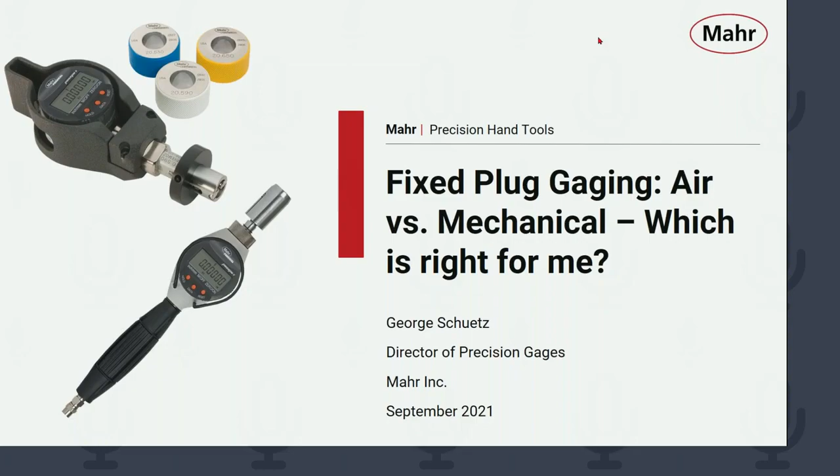Today's topic is fixed plug gauging, air gauges versus mechanical. Which is right for me?

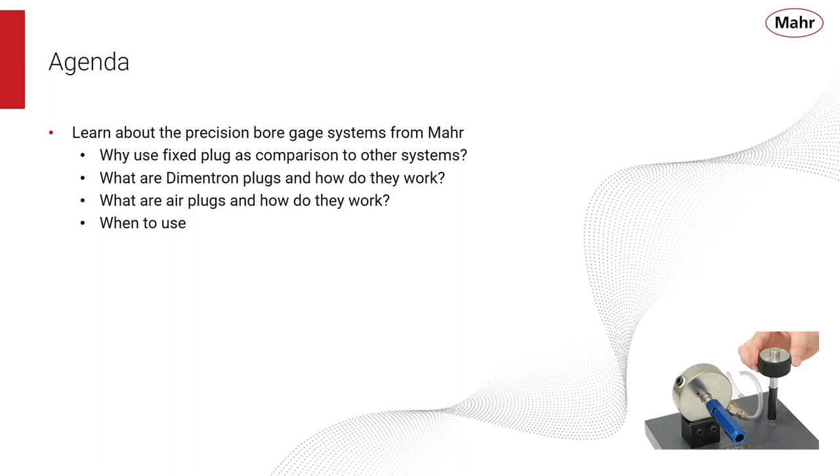Today we're going to learn about precision bore gauge systems from Mahr. We're going to see why we're going to use a fixed plug as a comparison to other types of plug measuring systems. What are Dimentron plugs and how do they work? What are air plugs and how do they work? And then we're going to decide which might be the best for our application.

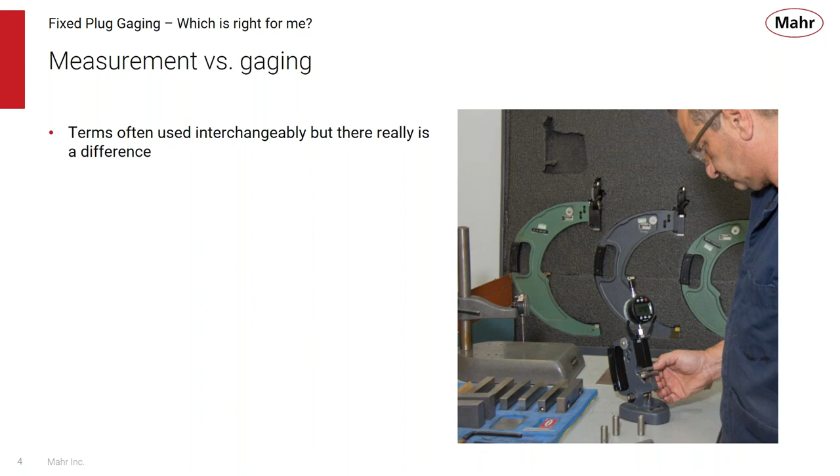The first thing I want to talk about is the subtle differences between measurement and gauging. These terms are often used interchangeably, but there really is a difference, and it can be a significant difference. I think measurement is the process of determining a dimension of a part by comparison to a standard, while gauging is a process of determining whether the dimension is smaller or larger than the standard. They sound kind of similar, but let's dive into this and see what the difference really is.

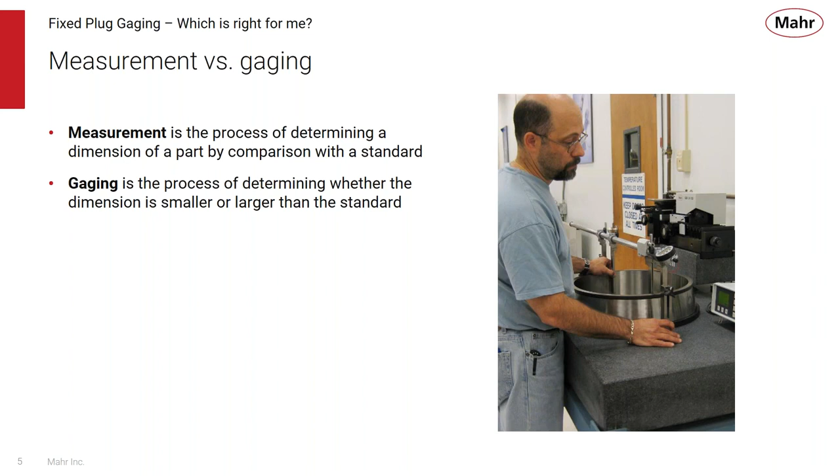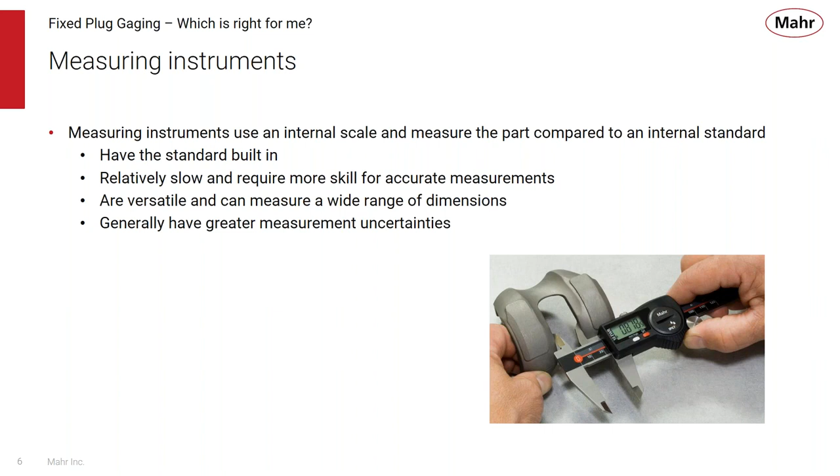Measuring instruments use an internal scale, and the measurement of the part is compared to that internal scale. So all measuring instruments have the standard built into them. They tend to be relatively slow and require more skill for accurate measurements. They're very versatile and can measure a wide range of dimensions, but because of operator influence and the way the gauges are designed, they generally have a greater measurement uncertainty.

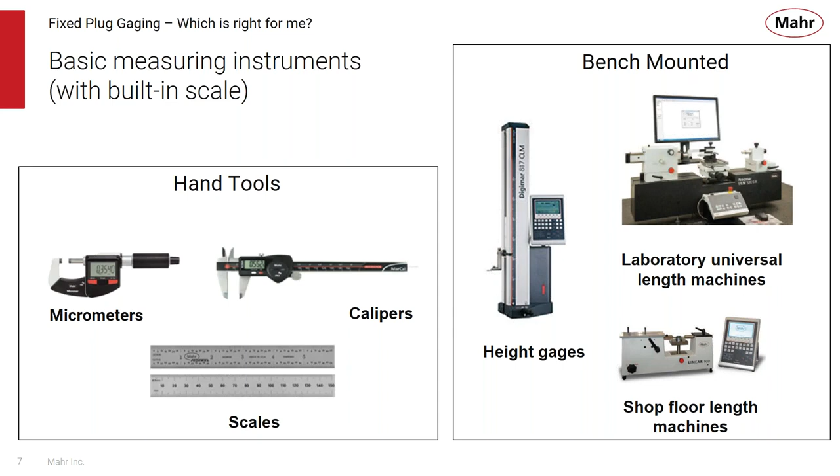These are examples of basic measuring instruments. They all have the scale built into them. You're familiar with micrometers and calipers, even the scales themselves, which have the lines etched into them. That is basically the reference standard that we're comparing the part to. You can have bench-mounted measuring instruments, such as height gauges, laboratory universal length machines, or even shop floor length machines. They have lots of versatility, they can measure lots of different things, and because of that, they tend to be a little bit slower for the operator to use. But under the right environment, especially with universal length machines, you can get some very good results.

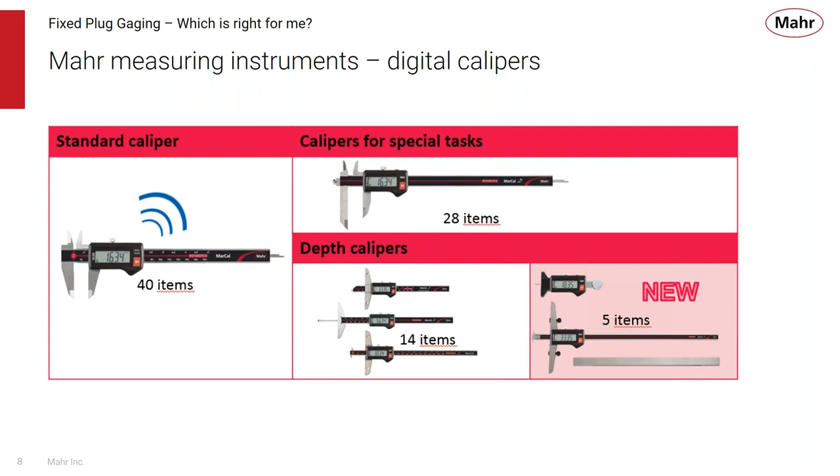Digital calipers are an example of a measuring instrument. Mahr makes a whole family of these, whether wireless or specialty calipers, depth gauges, and so forth. These are measuring instruments, as are micrometers, with their capability of different sizes, different ranges, different features, and so forth. So there's a whole family of different digital micrometers.

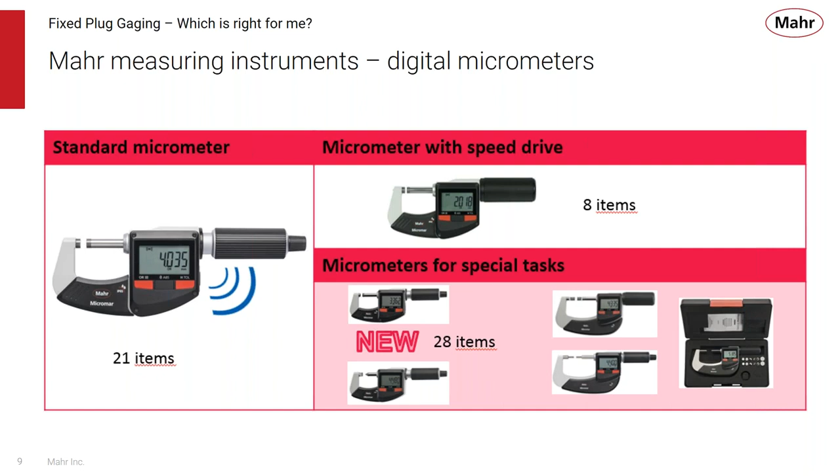Now, gauging instruments are a little different. They determine whether the dimension of the part is smaller or larger than a predetermined standard. So gauging instruments have external standards. They tend to be faster and more accurate than measuring hand tools. Because of their design, they're generally more dedicated to the task, and gauging instruments can be defined into different levels of performance.

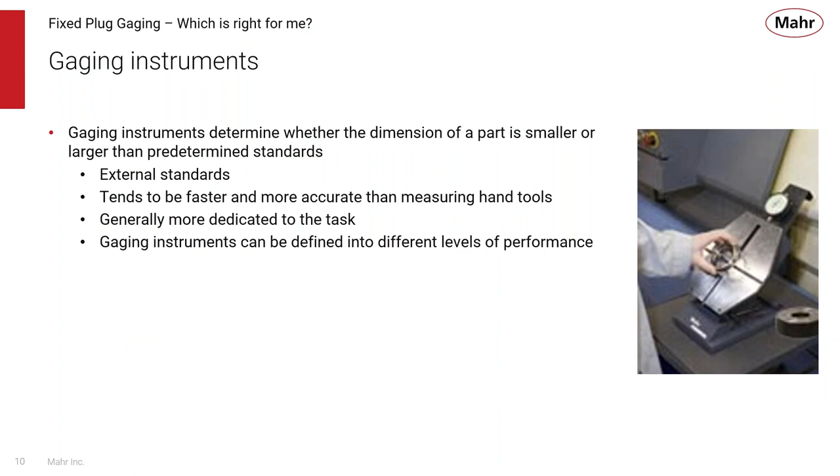The first level of performance for gauging is adjustable variable gauges. They indicate how much the part deviates from the standard it was set to. They can be adjusted to measure a specific size, but they have a limited measuring range with a lot of adjustable range. They provide the actual deviation, so you can get data out from that indicator if you like.

With these types of gauges, the operator has to sweep the part to capture, in the case of a bore gauge, the minimum size or the reversal point to get that diameter. So therefore, the gauges take some operator skill, but a skilled operator can be very fast, use the gauge with lots of ease, and get some very good results. All these gauges have an external standard, typically the nominal master, and these can have a fairly large investment, but they can last for decades when well maintained. By exploring the part, you can learn about the form, use that information for process trends, and maybe diagnose manufacturing issues.

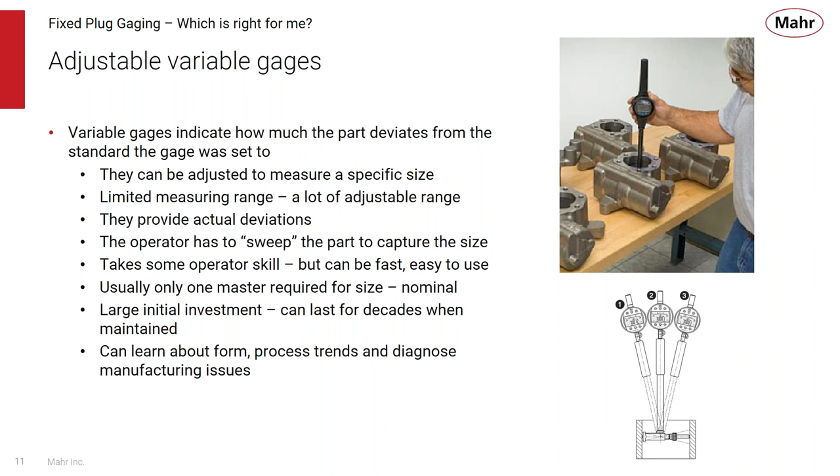So these are some of the adjustable variable gauges that are offered by Mahr: our adjustable bore gauges and our ID/OD portable gauging systems.

Now you can take an adjustable variable gauge and add a reference to it, and that really increases the capabilities or performance of the system. Variable gauges with a reference indicate how much the part deviates from the standard the gauge was set to. They can be adjusted to measure a specific size. They incorporate a reference stop, which helps position or lock the part into a repeatable place for measurement. That really reduces the operator influence, and you always can get the part back to the same location.

So these require very little operator skill. They can be extremely fast and easy to use. These variable gauges have limited measuring range, but a lot of adjustable range. Because they're variable gauges, they provide actual deviations. One master is required for setting. It's a big investment, but these gauges last for decades if well maintained. And of course, you can explore the part for form, process trends, and diagnose manufacturing issues.

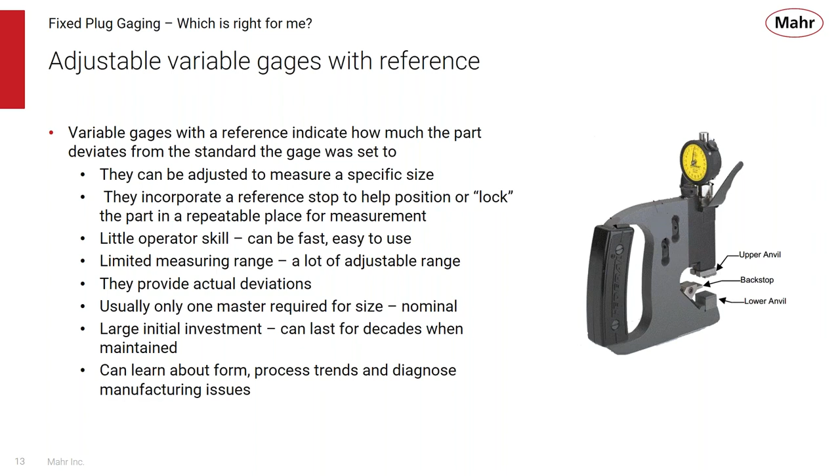So these are some of the adjustable variable gauges with reference that Mahr provides. Snap gauges for portable measurement. You can bench mount them. Plus, we make some ID/OD gauges in 2 or 3 point contact systems to measure IDs and ODs. Plus, if you have a stand and you put a backstop on it, that also increases the capabilities and repeatability of that gauging system.

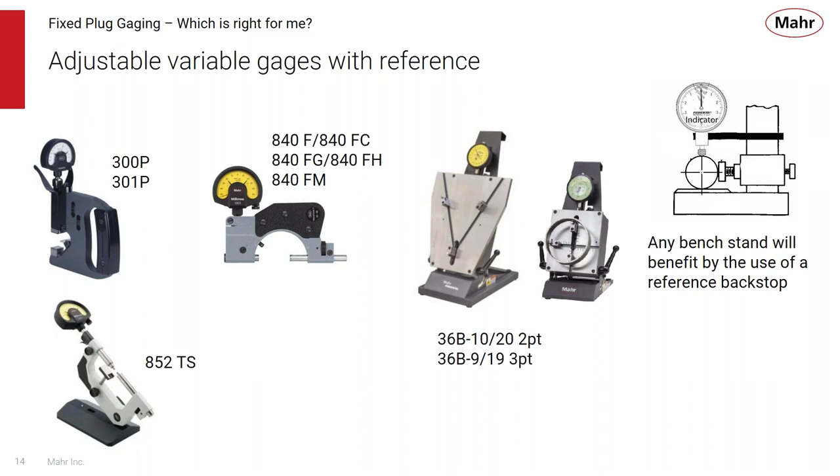And then there's fixed variable gauges. These are variable gauges made to a specific size. They tend to be the most accurate. They again provide actual deviation, so now you can collect that variable data. These have the least operator influence. The operator simply puts the plug gauge, for example, into the bore. There's no rocking, there's no centering. The gauge finds its own center. So it's the fastest to use with the highest performance.

Of course, these gauges measure only one size, so they're dedicated to that function, but you can really learn more about form, process trends, and information to improve that process, because you can get some very good results with very high resolutions. For measuring a single bore, this is the largest investment, but again, these can last for a very long time and in fact last millions of parts when used properly. Again, one master is required, a setting master for the nominal size.

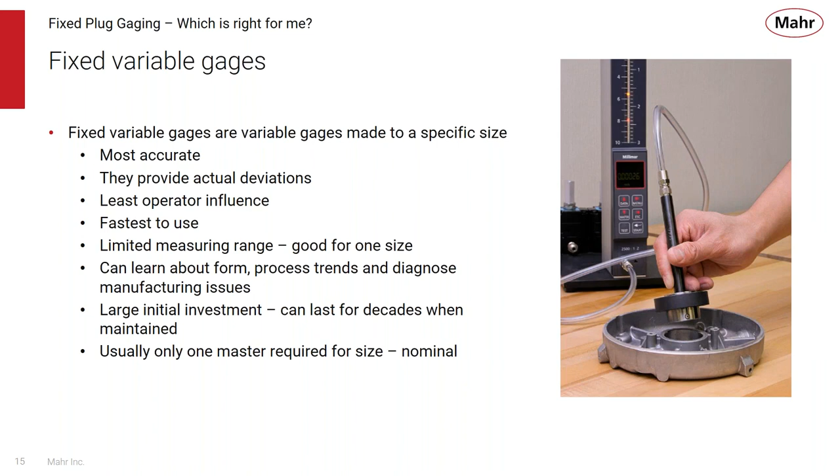So Mahr offers a number of fixed variable gauges. These are plug gauges, our Dimension plug line, our 844D ID plugs, and air gauging. All these plugs are made specifically to measure a certain size and tolerance.

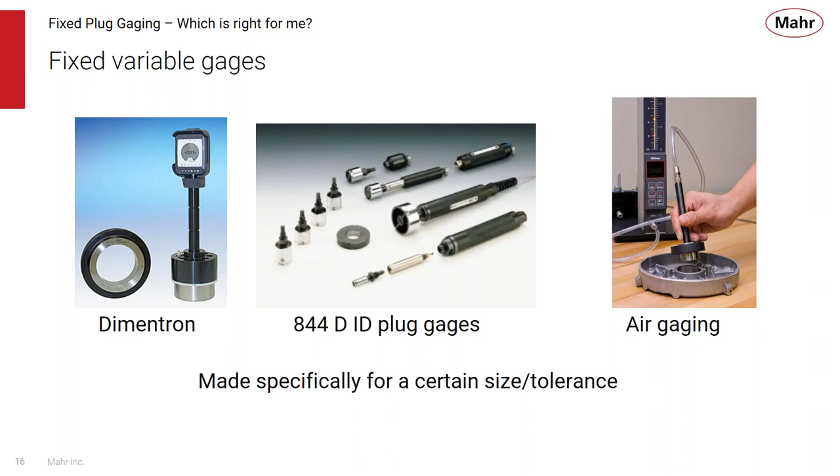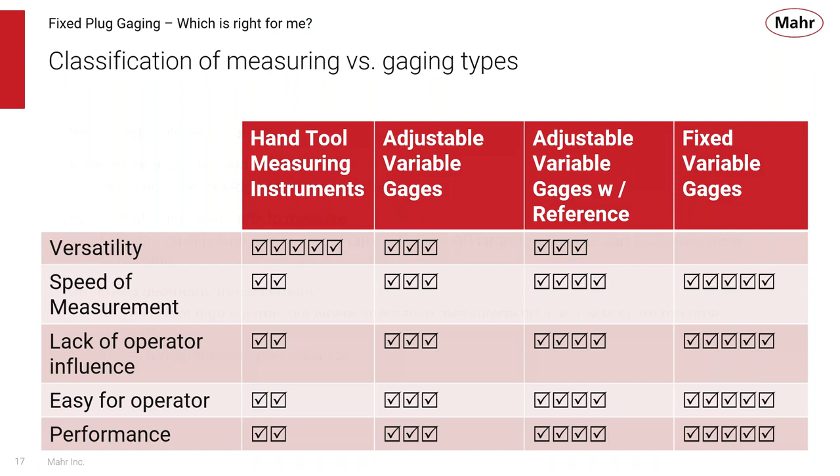So once you start talking about fixed plug gauging, you have to realize there's some qualifications for that. You have to have a pretty good tolerance condition. Tight tolerances are meant for fixed plug gauging. You want to know when that part is good or bad, and you want to know that variation so you can do something with that information. Usually these types of gauges are used when there's a high volume of parts because it allows the operator to measure that part as fast as possible with as little influence as possible.

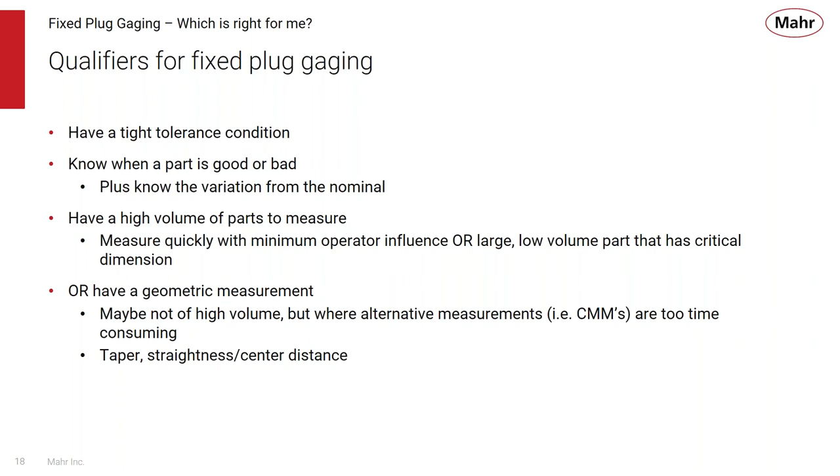But sometimes fixed plug gauges are used in applications where the volume might be low, but there might be no other way to get the performance that's required. And sometimes these plug gauges can be used to help find geometric conditions, and we'll talk about some of those because there might be no other way of doing that type of measurement out at the point of manufacture.

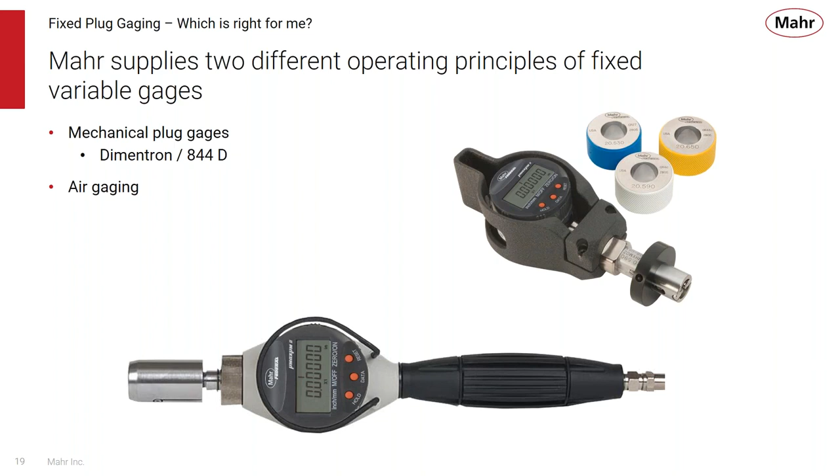So we said that we supplied two types of fixed plug gauging, our mechanical plugs and air gauging. And if you compare them, there's different qualifications for each one of them. Now let's take a look at the differences and the different applications for a mechanical fixed plug gauge or an air fixed plug gauge.

With mechanical plug gauges, we say that we want a tight tolerance. Tight tolerances are plus or minus 10 thousandths of an inch or so, high volume of parts, little operator skill—all the features of a fixed plug gauge. These can get some pretty good accuracies, 10 microinches.

We're going to know the variation. Because there's mechanical transfer in the way these gauges work, they have to be used in a fairly clean environment. Most of these plugs have a flow-through type of operation, so you can clean them out, but the mechanics and dirt just don't mix sometimes, and we have to make a consideration for that.

They can be used in a shop environment. They're very low cost to operate. The nice thing about mechanical fixed plug gauging is that they're very portable. There's no air supply or cables or anything like that to get a good measurement. So a person can carry this around, put it into the machine tool, make the measurement, and use this truly at the point of manufacture.

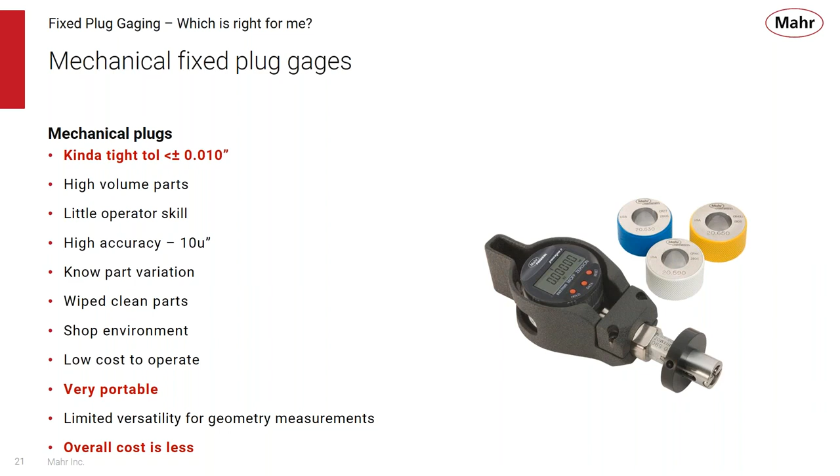You can get some limited versatility for geometric measurement. By that I mean you can explore the part for an ovality condition or potentially a straightness or taper type of condition, so you can get some information about the form of the part. Overall, these cost probably a little bit less than air gauging.

We make our Dimentron plug lines here in Providence. They're very, very rugged. They have a standardized zero reference, which means that you can take any plug, exchange it with the handle or the display, and the zero is set to within a certain tolerance. They're fully interchangeable, and you don't have to make any adjustments when interchanging plugs. These types of plugs are repairable, and there's lots of opportunities for making specials of these Dimentron plugs.

We also offer our 844D plug system. This is a plug made in Germany. It can be repaired. There are options for doing a zero reference. They are very rugged, there are some specials, and these offer some different types of application support.

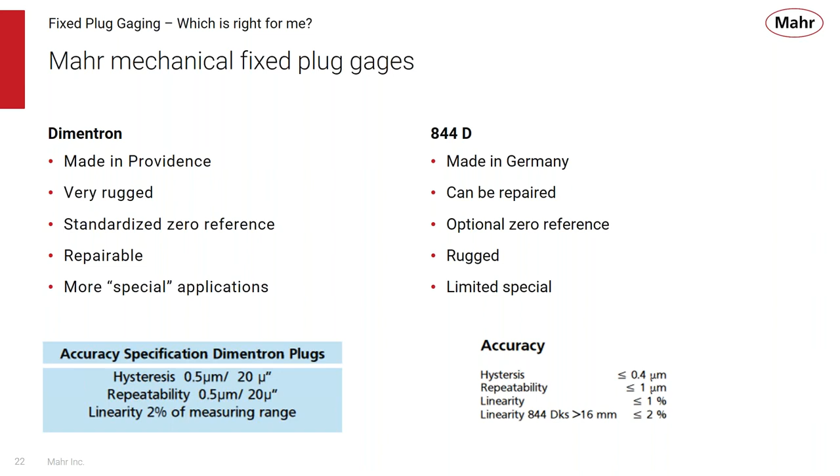So both lines are fixed plug gauging, and there are just some slight differences between them, which can be considered when trying to measure a precision bore. They have very similar measuring and specifications, size ranges, etc.

So when you're considering a fixed plug gauge, a mechanical one, you should know how they work, what the sizes are offered, the actual measuring range of the specific plugs, how to match the part tolerance to the plug range, what are the standard configurations, the different displays that can work with them, and any other information that might help you select the right plug.

Mahr has a very good technical support team in Providence. So if you have applications for mechanical fixed plug gauges, you can contact us with the diameter, the tolerances, and the application needs, and we can make the best recommendation for that application.

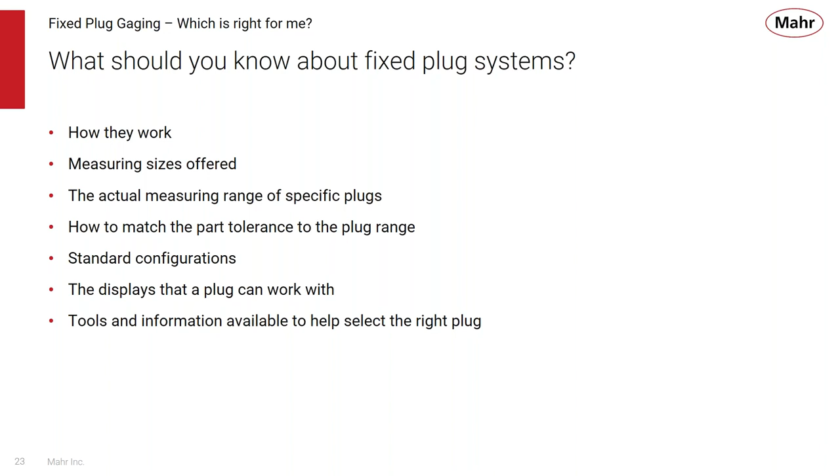Is selecting that fixed plug mechanical gauge black magic? Well, not really. Applying a Dimentron or the 844 is no different than selecting an adjustable bore gauge, an air gauge, or a snap gauge. You have to know what the size is, what the tolerance is, and where that measurement is. But because it's made to a specific size and application, if you make a mistake in specifying it, it's going to make a plug to the wrong size and you might not be able to use it. So it's very critical to ensure that the size and tolerances are specified correctly for a fixed mechanical plug gauge.

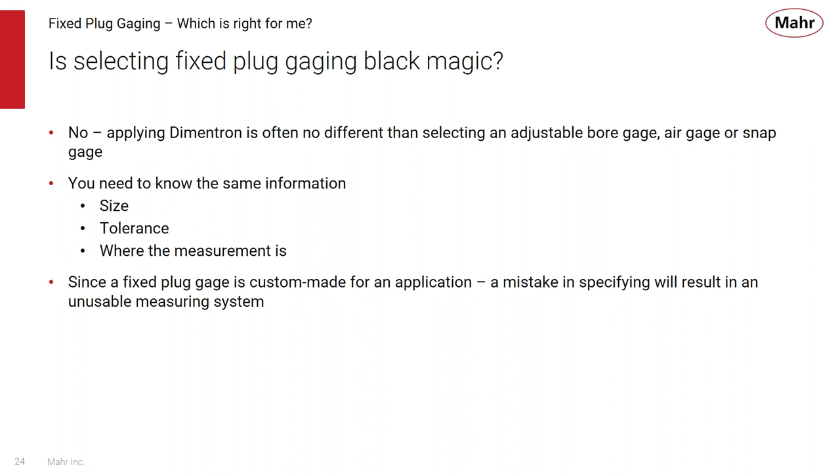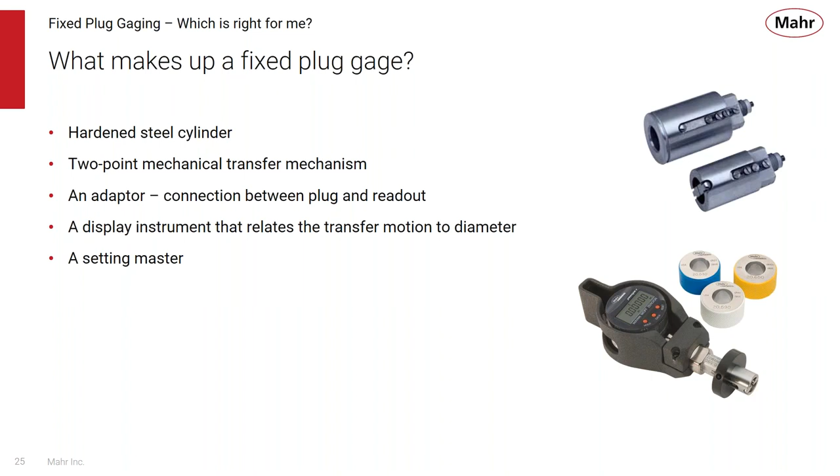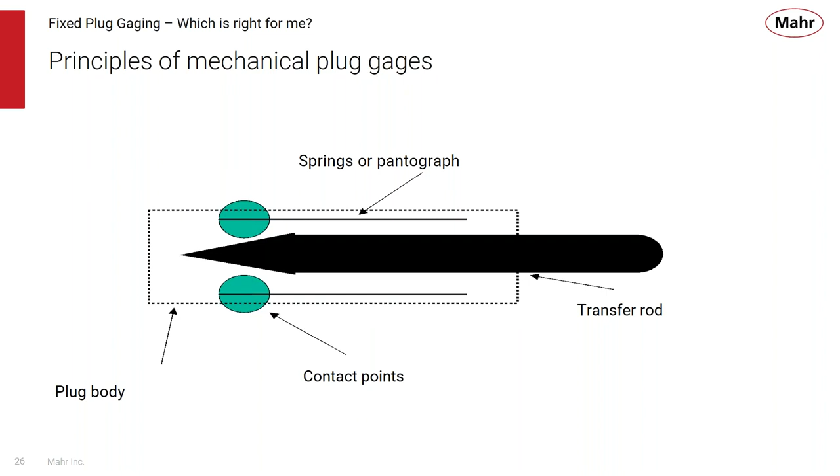So basically what's inside a mechanical plug is a number of contact points—2 contact points on either a spring or a flexure that, when compressed by the bore diameter, pushes the V-rod back out of the plug, and then we have a display unit measuring that variation. So you can see as I go back and forth here, the V-rod is pushed back and the measuring instrument records and looks at that value. It's a very simple concept, but it provides a 1-to-1 ratio of the V-rod to the movement, so there's no compensation needed for the display using the plug gauge systems.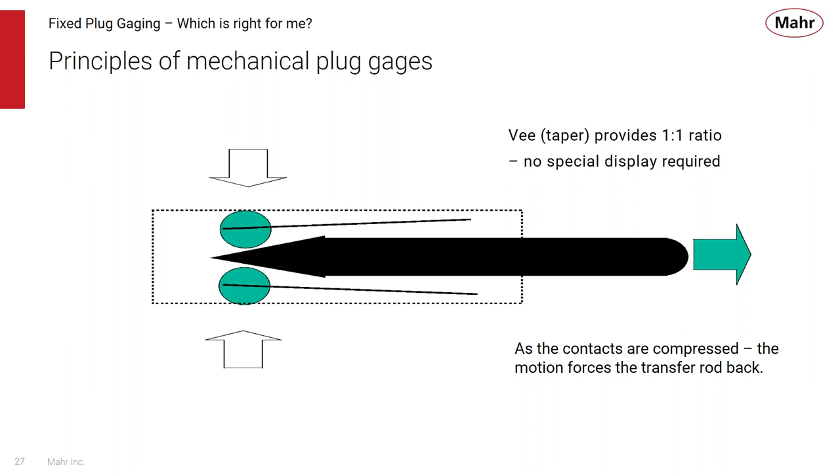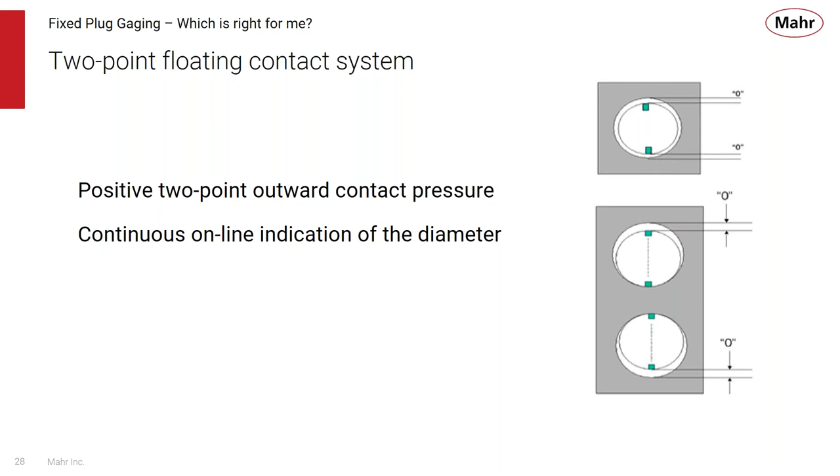Because it's a 2-point measuring system, kind of a differential measuring system, the body or the plug can be moved slightly, even with its small clearance. You will not get any variation in the diameter, because as one contact moves in, the other one moves out, and you still get the true diameter of the part, whether you're measuring it axially or radially. So you have a continuous online indication of the part diameter.

Because of that, you can take that plug gauge and put it into the bore, measure the diameter, but now you can rotate it or move it up and down axially in the bore to explore the bore for barrel shapes, taper, or hourglass shapes. We also make blind hole plugs or through hole plugs, so that depending on the bore application, we can get as close to the bottom of the bore as we can.

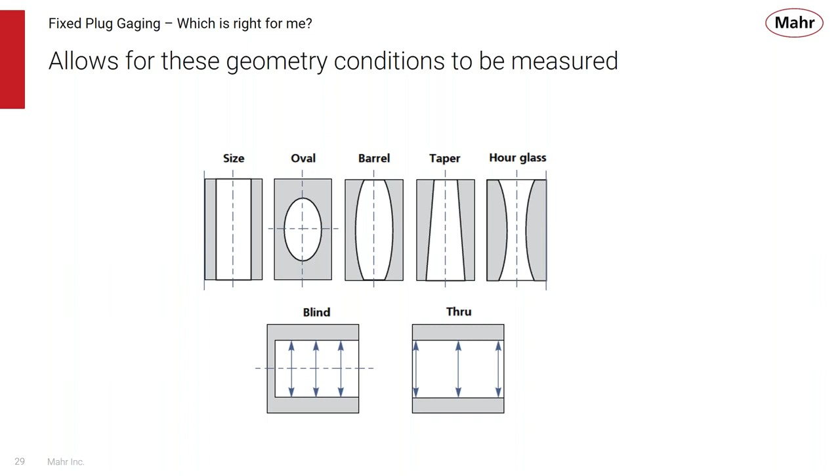Blind hole plugs have a dimension of 157 thousandths of an inch to the bottom of the plug. We can make plugs that are closer, down to 80 thousandths. And we also have a super blinds family that can get down to 31 thousandths to the bottom of the blind hole. Plug starts at 120 thousandths, and we can make plugs up to 9 inches, and even special larger sizes are available. So we can cover a full range of different tight tolerance bore characteristics with mechanical plug gauging.

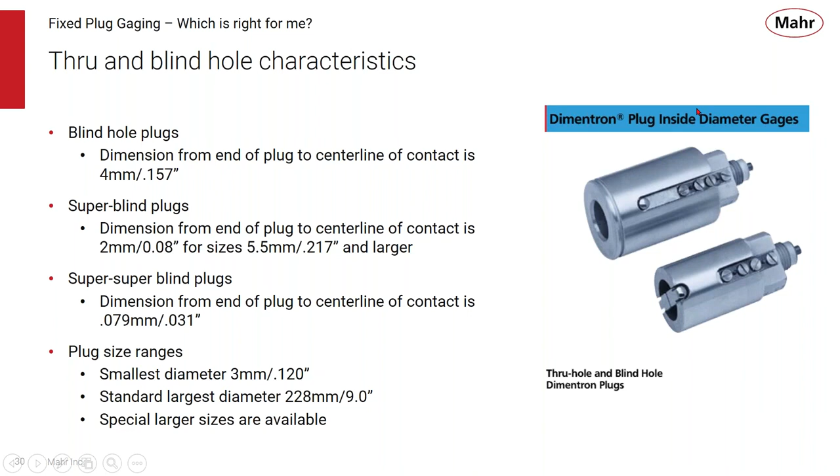The features of our plugs are that they're engineered for high production use. They have a hardened body, and can be flash chromed or coated with a diamond-like coating. We use carbide contact points, but we do offer options for steel or sapphire when the material of the bore requires those types of contacts. You get very good repeatability and excellent GR&R capabilities. Calibration accuracy is better than 2% of the full range.

I talked about flow-through cleaning so that dirt will not stay in there if the plugs are cleaned on a regular basis. And they are self-centering, a differential measurement, the way they work, so that they can give you a true diameter regardless of the orientation in the part.

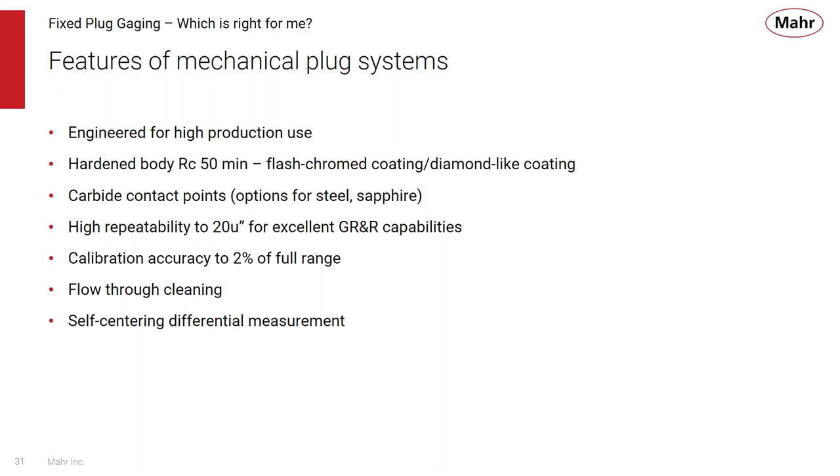So that's kind of the overview of mechanical plug gauges. Let's take a look at air gauging applications for bores.

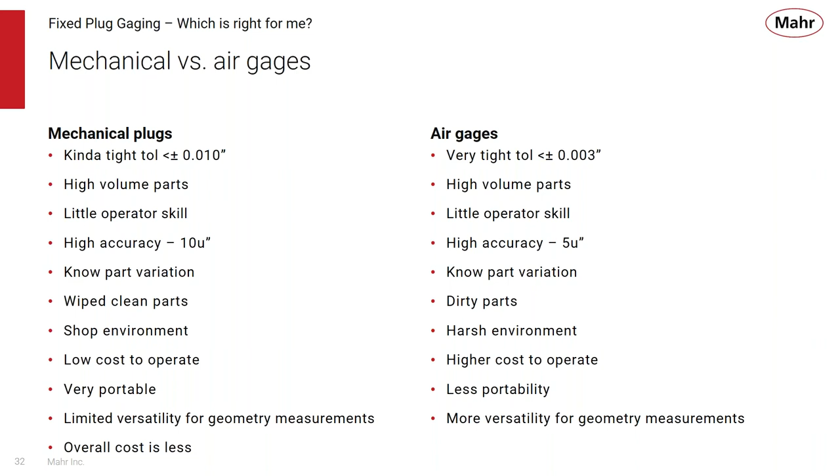Air plugs can measure a tighter tolerance, tolerances that are plus or minus 3 thousandths or smaller. Again, because they're a fixed plug system, they're good for high volume parts, and offer the operator a very easy to use system. You can get accuracies of 5 microinches or better, especially for repeatability, because these are used over such a small range, and you can get very high resolution applications.

Again, we're going to know the part variation. The nice thing about air gauging is because air is flowing out of the system, it tends to clear away any water-based contamination in the bore. So these are really great items to use at the point of manufacture in those harsh environments. They tend to be a little bit higher cost to operate, but they can give you a much higher performance measurement.

Because air plugs have a hose to them, that kind of restricts portability a little bit, but the air hoses are very flexible and can go up to 10 feet with no problems and still use that air plug in the machine at the point of manufacture. The nice thing about air plugs, as we'll see in a minute, is that they have more versatility for geometry measurements.

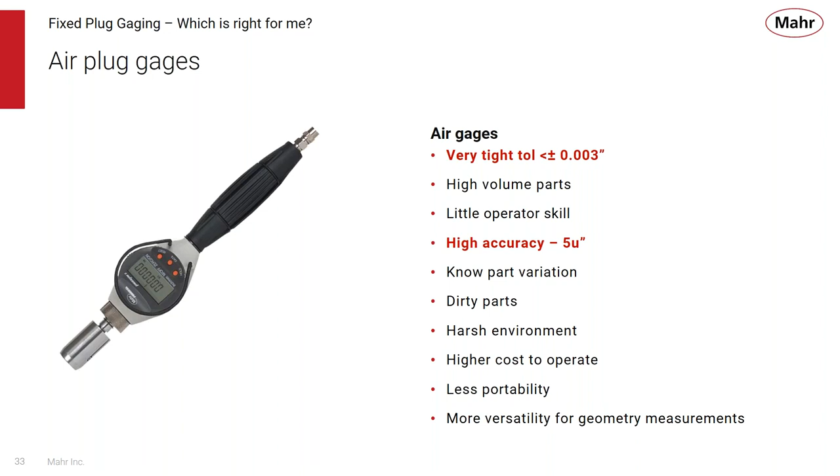So why use air gauging? Again, it's a fast, self-aligning measuring system, very high resolution, very easy to use. It's non-contact. It doesn't have contact points like a mechanical plug gauge. Of course, because it still has a body that touches the bore, the plug is contacting the bore itself, but the measuring part is non-contact because it's using air back pressure to make its measurement. And it's kind of a self-cleaning type of plug where the air clears away any water-based surface contamination.

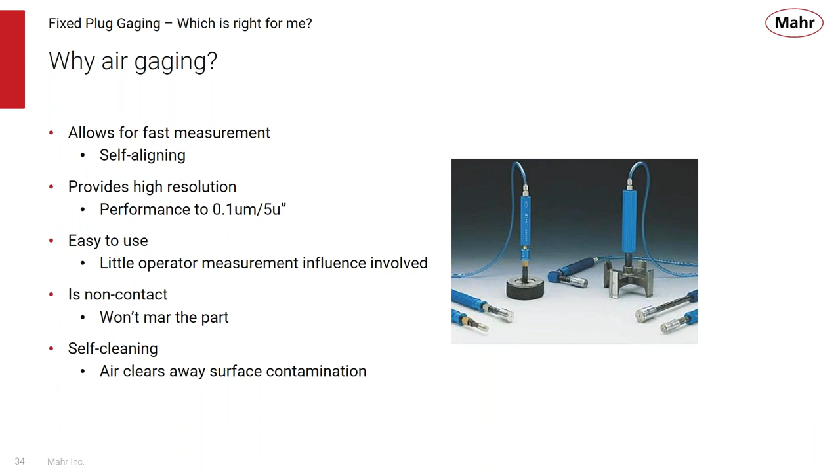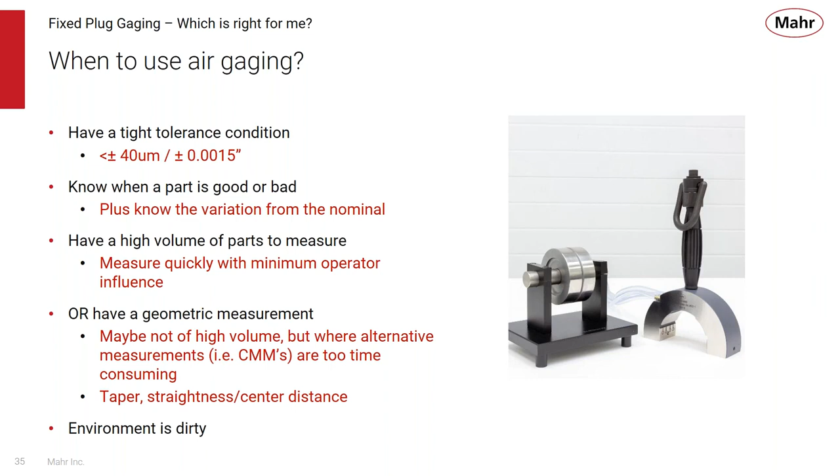So again, we use these in a tight tolerance condition. We want to know the variation, and we want to make the measurements quickly, especially for high volume applications with minimum operator influence. Because they offer such a high degree of performance, you might have a very large diameter in a low volume part, and there might not be any other way of making that measurement on the shop floor than air gauging. So air gauging, despite its cost, might be the best way for some low volume applications. And air gauging gives us more capabilities of looking at the part for taper, straightness, center distance, etc. It's great for the environment when it's at the machine and it might be a little bit dirty.

So is air gauging difficult to apply? Well, not really. It's the same type of questions you have to ask about any application. You have to know the part size, the tolerance, where the measurement is to be made, and what's important with air gauging is we should know what the surface finish is. Since air gauging is custom made, just like the mechanical plug, any mistake in specifying the tooling could result in an unusable measuring system. Same questions to ask for any dimensional gauge application.

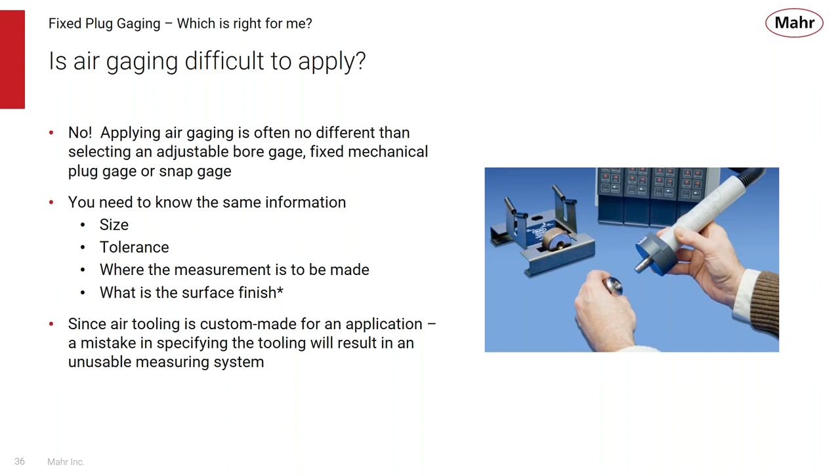Now, how does an air gauge work? Well, it works on the idea of back pressure. Just like you might hold a garden hose against the wall and close the distance, the water is going to spray off until it's finally shut off. Something's happening to that water pressure that's in the hose - it increases as the distance decreases. So water and air act very similar, and you can do the same thing with an air gauging system.

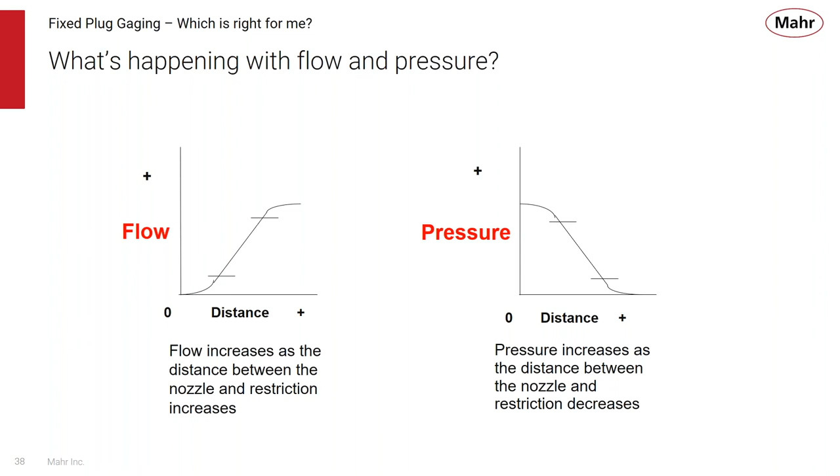If you plot out airflow or the pressure in the hose, you get two opposite pressure-distance curves, or a flow-distance curve. On the pressure side, as the distance between the jet or the nozzle decreases, the pressure increases. And as the spacing increases, the pressure decreases. So if you can control the pressure, the jetting, and the hole dimensions, you can create a very straight linear part of this curve. And that's what we use to determine diameter by air pressure.

This is the basis for all our air gauge systems. When we can control the air pressure, the manufacture and position of the air jet, the manufacture of the air plug, and calibrate and zero the location of pneumatic zero, we can get very repeatable and accurate results. These results can be used as the means for displaying a dimensional measurement. This is the basis for all of our air gauge systems - they're all made to a common standard, interchangeable, just like our mechanical plugs.

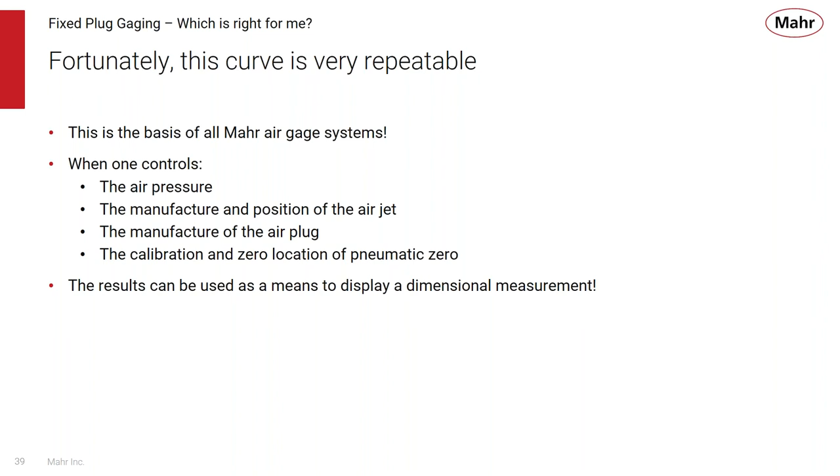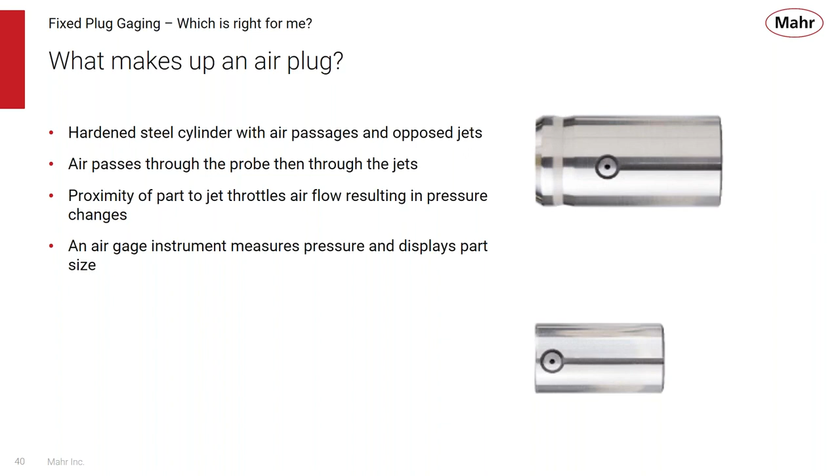So the air plug is nothing more than a hardened steel cylinder with passages for opposed jets. These are examples of two-jet air plug systems. The air passes through the probe and comes out of the jets. The proximity of the part throttles the airflow, resulting in pressure changes back towards the instrument, and the air gauge instrument measures that back pressure and displays the part size. Again, if we can control all the characteristics of the plug, we can provide a very accurate measuring system.

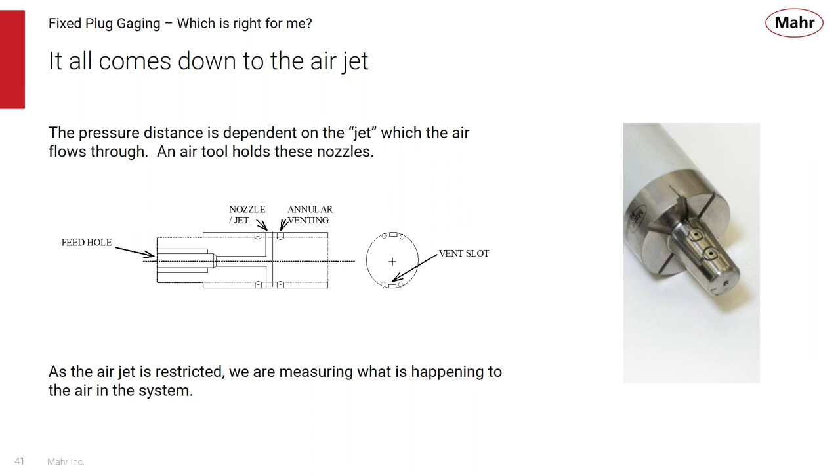I think it's probably the greatest feature about air plugs - the jets themselves, which are really sensors, can be positioned very close together. I don't think there are too many other sensors that can do the same thing at the cost of an air plug. Typically you can put jetting as close as 100 thousandths of an inch, but sometimes even closer. So this provides the capability of doing multiple dimensions or geometric checks in a single tool.

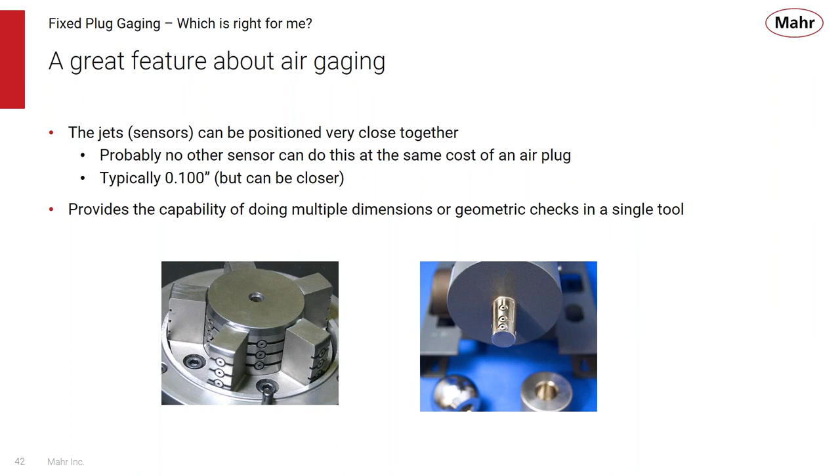So here's a couple examples of multi-circuit air plugs doing multiple diameters at different levels. And if you try to consider doing this either with, I don't know, mechanical transfers or probes or something like that, it'd be nearly impossible to do something like this out on the shop floor and get good results.

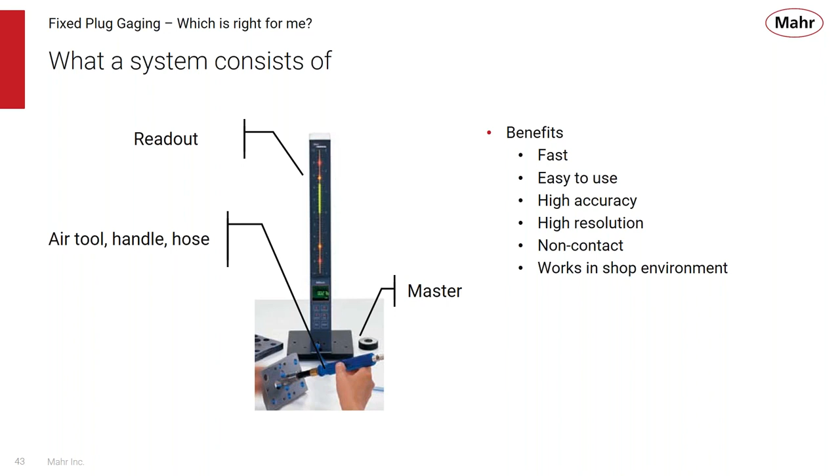With an air gauge system, you have kind of the same types of components: you have the air tool, a handle, and a hose, a readout, and a master. With these three parts, you can create an air gauge system that's fast, easy to use, highly accurate. You get good resolution, it's non-contact, and it's great for the shop environment.

Air plugs are very similar to mechanical bore gauges. They allow us to explore the part for size, ovality, barrel, taper, and hourglass. But because of their higher resolution, we can measure tighter diameters and control those form errors even better.

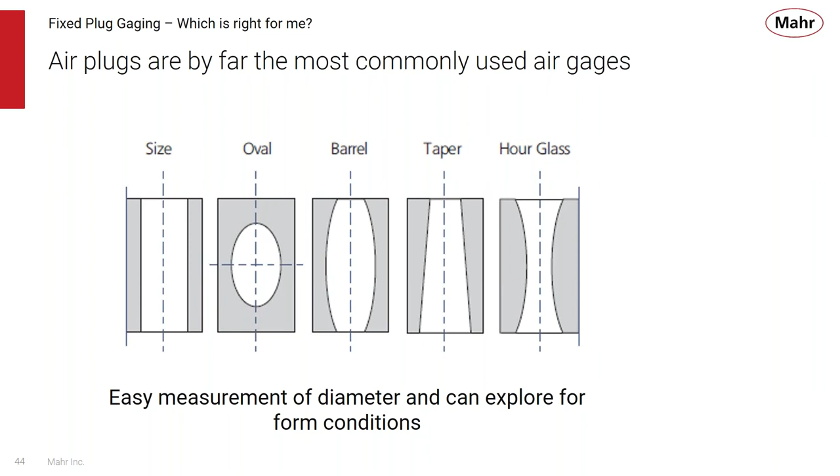We talked about knowing surface finish as part of the part size and tolerances. Surface finish is important with air gauging because the jets have a certain diameter, and in order to throttle that jet, you have to close off the surface. If that surface is rough, it might have peaks and valleys, and air has to fill those valleys to create the back pressure. So what's happening is the zero point of the back pressure might be below the peaks of the surface.

Now think of a mechanical plug gauge, for example. A mechanical plug gauge is going to ride along the peaks or high points of that surface. So if you have a mechanical plug gauge riding on the peaks and an air gauge reading something below those peaks on a rough surface, you could get a discrepancy between those two types of measuring solutions.

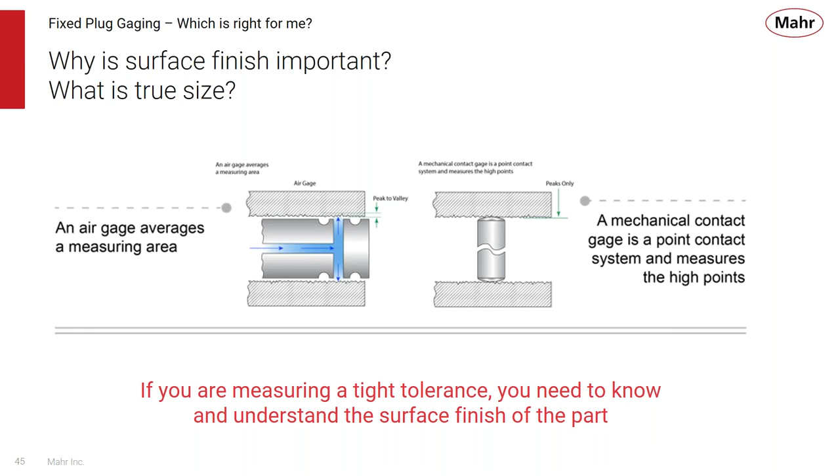So it's very important, if you have a very tight tolerance, to know and understand the surface finish of the part. For most general applications, surface finish should be something in the area of 40 Ra or less in microinches, and anything better than that will tend to give us the best results.

Now you can get different types of air plugs. Same concept here with through bore air plugs, blind and super blind. We can make longer air plugs that could be relieved or non-relieved, and we can put stop collars on air plugs. Then you can talk about the number of jets built into the plug. The most common use is a 2-jet system, typical for measuring IDs and ODs.

A 3-jet plug will help identify odd numbers of lobes for form error -- we'll take a look at that in a minute. We can also make plugs with 4 or 6 jets that give us an average diameter, or the average of a 2 and 3 lobe condition. So there's lots of capabilities and possibilities for air plugs.

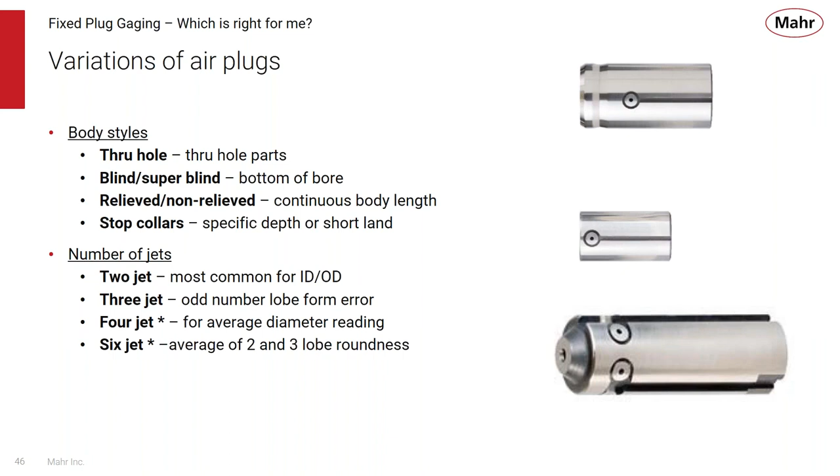Knowing that, if you did a form measurement and know your parts have this type of condition, we can provide a 3-jet air plug specifically designed to measure the diameter of these types of parts. This really ensures a better fit or better match of IDs and ODs when doing an assembly of a number of parts. So air gauging offers a lot more flexibility.

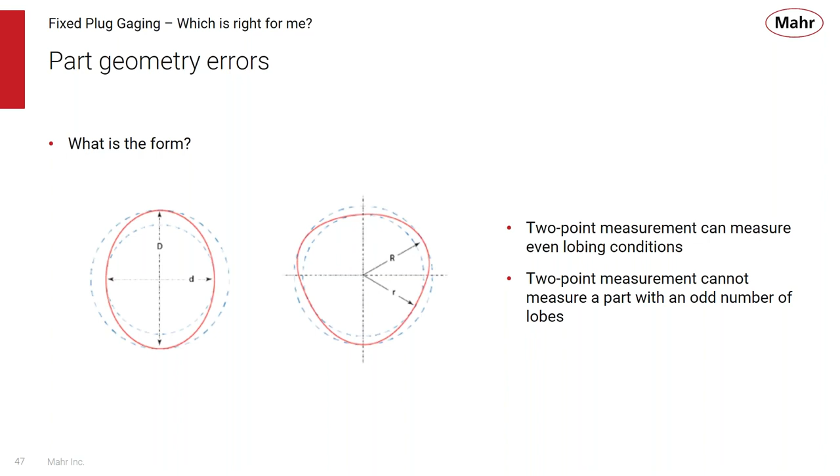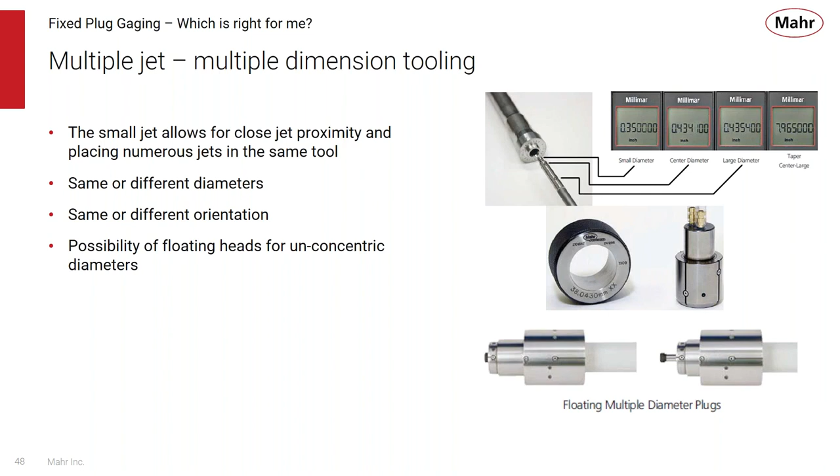Because of the small jets, we can put the jets closer together to do multiple dimensions in a single plug of the same or different diameters. We can also make plugs that have floating heads, making multiple diameters where the concentricities of the part may not be ideal for a standard fixed body air plug.

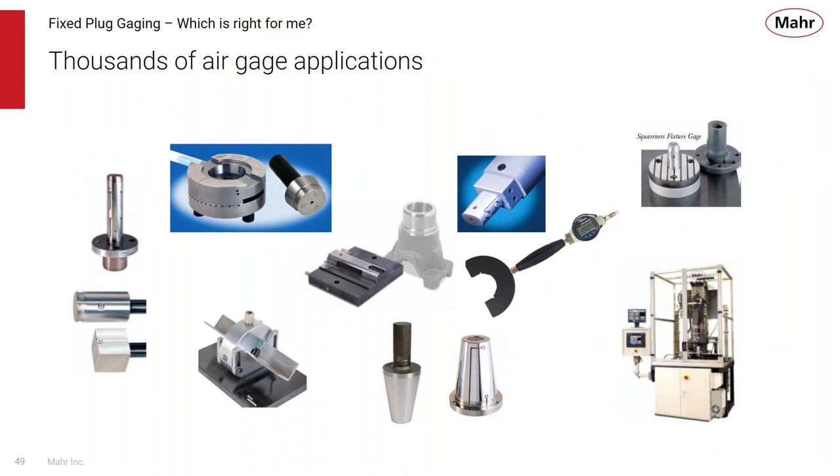We have thousands of different air gauge applications, multiple diameters, multiple sizes, multiple jets, and tapers are another great application for air gauging, whether it be a machine tool taper or an orthopedic taper, where we can measure two diameters at a known distance and provide taper angle. Some of these medical tapers are very small, and again because the jets can get so close in such a small diameter, there's no other way to measure these parts and get such good, fast results.

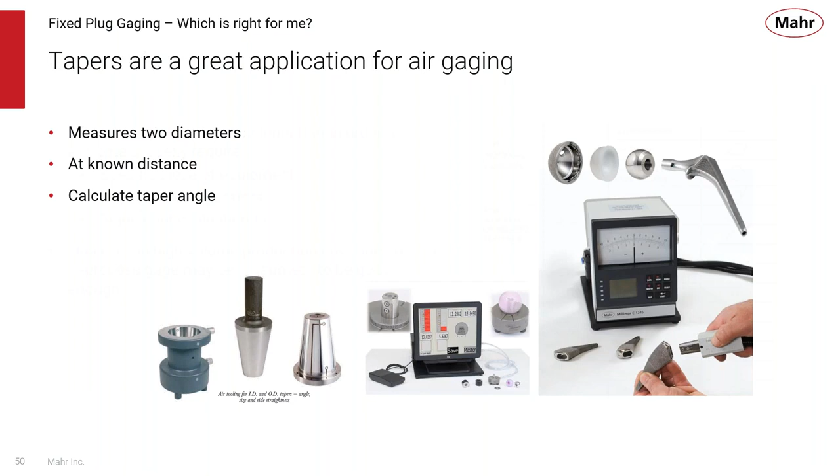Again, with the jets, we can do point-of-manufacture geometry type checks out on the shop floor. If the blueprints call for roundness, straightness, or parallelism, you might be able to do these types of measurements with air gauging at the point of manufacture.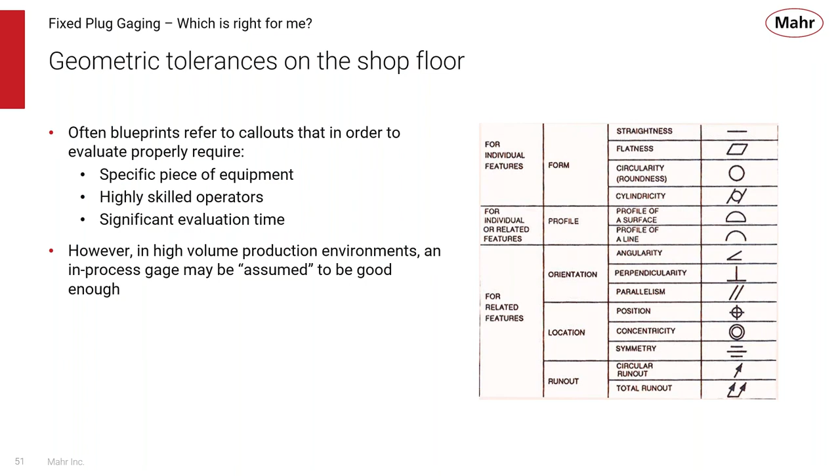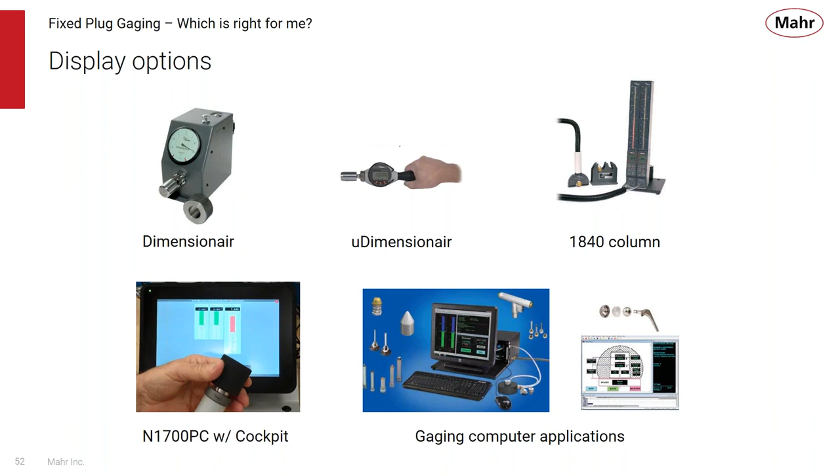Just like mechanical plug gauges, there are different types of readouts available. Our uDimensionair is similar to a digital indicator. We have analog and column gauges, even PCs and bench amplifiers, all made to provide the right display options with the right resolution for the application.

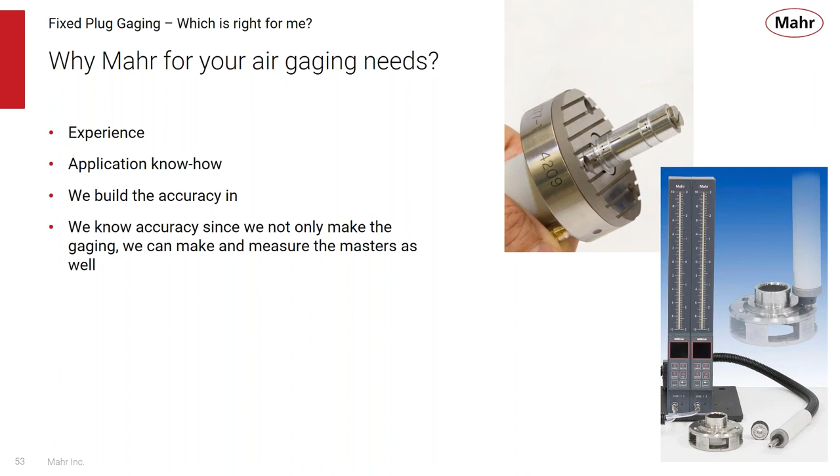So why Mahr for your air gauging needs? Well, again, we have thousands of tool designs over the years. We have the application people and know-how to help provide the right tool for your application. We build the accuracy into our plugs because we set everything to a known internal standard, so everything is interchangeable and calibrated, ready to go to make your measurements. And of course, we know accuracy since we not only make the gauging, we make the masters, and we can certify and measure all the tooling and masters.

So which one is the right method for you? Is it a mechanical plug gauge or an air plug gauge? Well, again, you have to ask the questions. What's the tolerance? What's the application? Where is it being used? What's the environment like? All these questions help select the right tool that makes the most sense for your application.

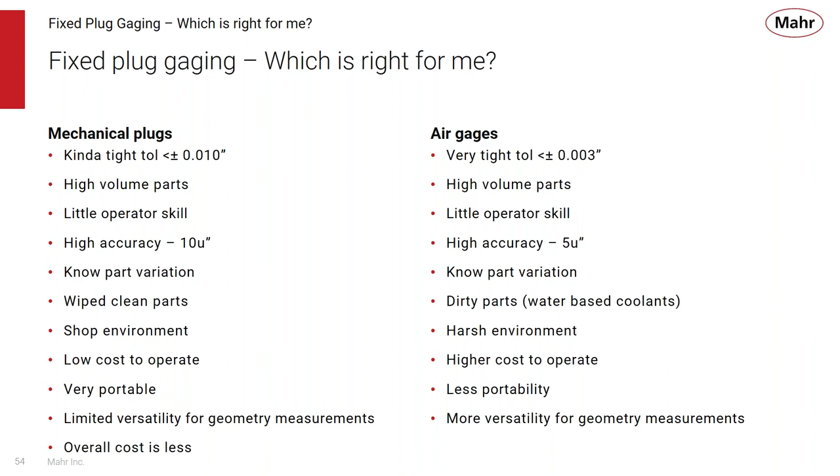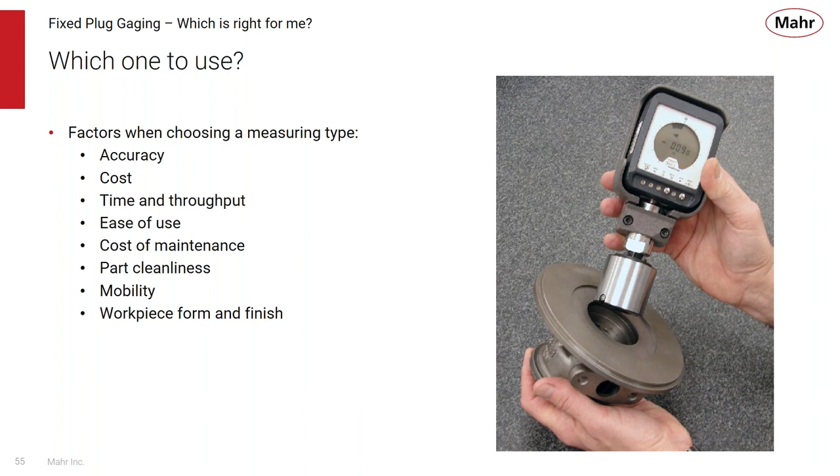So which one do we use? Again, look at the accuracy, look at the cost, time and throughput, ease of use, cost of maintenance, part cleanliness, mobility, workpiece form and finish. These are questions and factors in selecting the right tool for the application.

You might also consider if you want to do some data collection, know whether parts are good or bad. Do you have to do a TIR or a dynamic measuring condition? How comfortable is it for the operator to use, and what's the visibility of the operator? Does he have to reach into the machine, try and look at the gauge, or use a remote display to see that result?

Do we need to do signal sharing between different diameters to calculate a taper, for example? Or do we want to bring the part to the gauge or the gauge to the part? All factors for selecting the right fixed plug gauging solution.

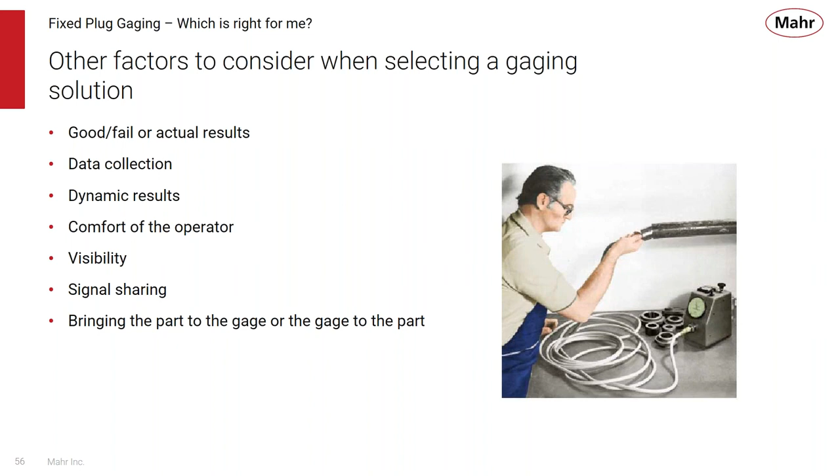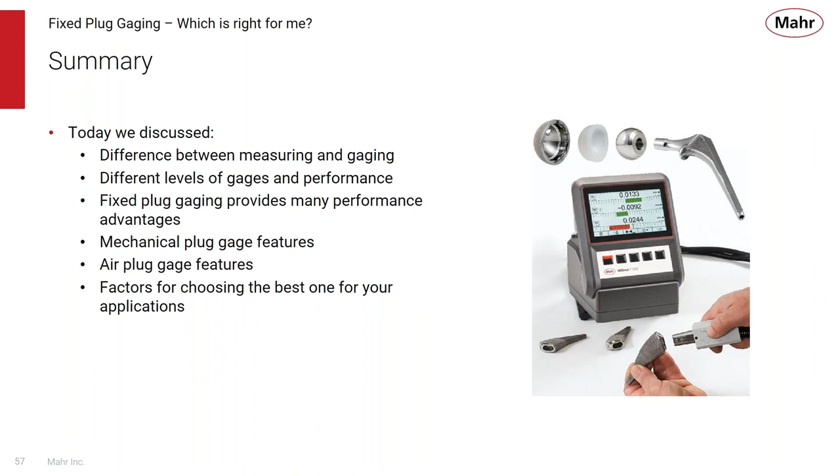So we've talked about a lot today. There's no true fixed answer or logic to selecting the right one, but there are lots of questions to ask, and I think if you come to Mahr, we can help you answer those questions. So we've discussed the difference between measuring and gauging, the different levels of gauges and their performance, fixed plug gauging and its performance advantages, how a mechanical plug gauge works, its features, the same for air plug gauging and its features, and the factors for choosing and the questions needed to provide the best one for your application.